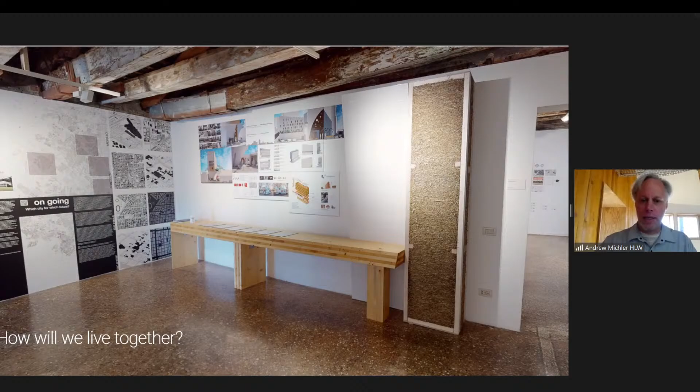Here's the installation that we have in Venice. You can see the Ecococon panel and the LignoLoc table, CLT table here, and then a display of concept projects. Certainly that how will we live together theme was very much on the principle of what I was thinking about as this project was coming into being, the concept.

Part of the framework for that, a good place to start, is this ProPublica article that came out, I think last year, titled Where Will Everyone Go? It was basically an examination of how climate change is impacting Central America, especially around agriculture, and how it's forcing large populations both into the city and up north.

I'll read this quick quote from it: By 2070, the extremely hot zones like the Sahara, that now cover less than 1% of the Earth's land surface, could cover nearly a fifth of the land, potentially placing 1 of every 3 people alive outside the climate niche where humans have thrived for thousands of years.

So that's the reality that we're living in. And how will we live together? Where are we going to live, and what are we going to live in is kind of what I'm looking for. So in my proposal, I'm looking at a building that will be housing for climate refugees from Central America.

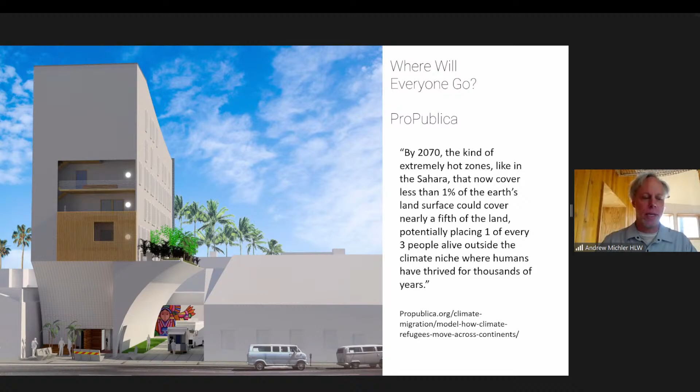Essentially, in Los Angeles, I chose a place called Wilshire Boulevard. Wilshire Boulevard, in some ways ironically, is the invention of what we call strip malls in the United States. It was the first place where you parked, walked to the shop, then went back to your car and drove to the next shop. So it's the invention of kind of modern America.

But it's becoming extremely urbanized, happily. The project itself is near Koreatown, on a kind of lot. The idea was to take a lot that is quite dilapidated, mostly parking, a very simple single-story building in a dense area. The metro station just came in there, so it's a good place to start thinking about where we can put larger scale housing, especially in Los Angeles, where the housing pressure is enormous.

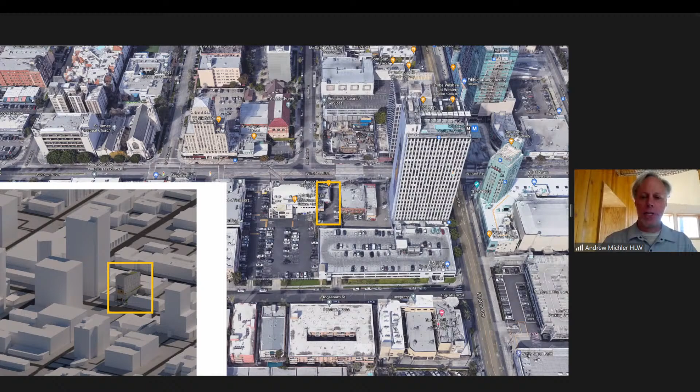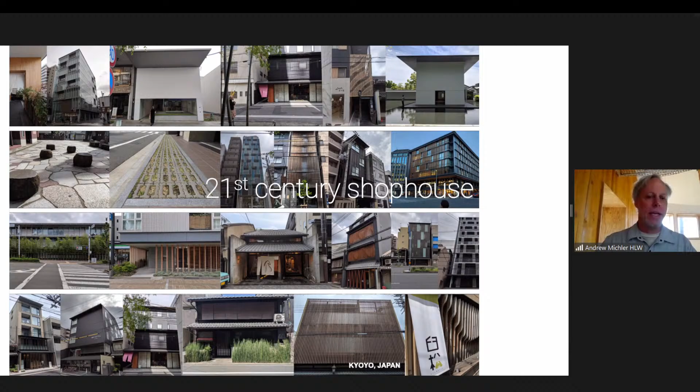Part of the concept, a large part of it, was reinventing the idea of the shop house principle. Many immigrants came to the United States and different nations and lived in buildings where they live in the upper stories in the back, and the front would be where they actually did their business, often revolving around food and sharing their cultural contribution in the form of food. So that was the place to start, thinking about how we will live together, how people will be integrated into different places.

The other component was I developed a food truck with a friend. It's actually a coffee truck, coffee bar, espresso bar, we call it. Part of it was the idea of how do we release ourselves from food in the brick and mortar. So we decided to look at food trucks and converted a 1979 Toyota camper into a full service espresso bar. That's been quite successful. It's won architecture awards, and it's been a lot of fun to put together.

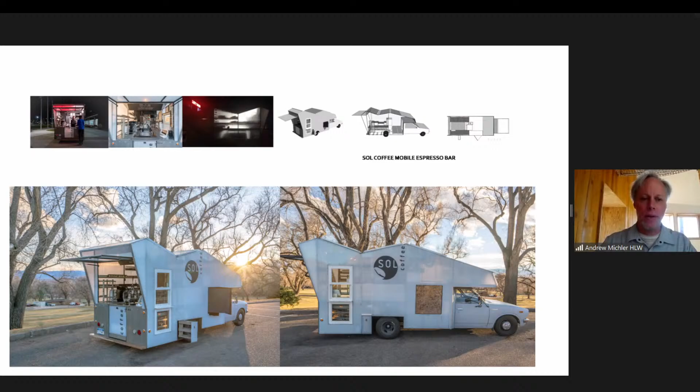So the idea was how to integrate the food truck culture back into Wilshire Boulevard and bring people back into that enormous sidewalk, that enormous tarmac, how to reactivate that for people again. And then also as a place for, there'll be a commissary kitchen there, another place for people who live there to actually work with the trucks, or start their own small food businesses on site.

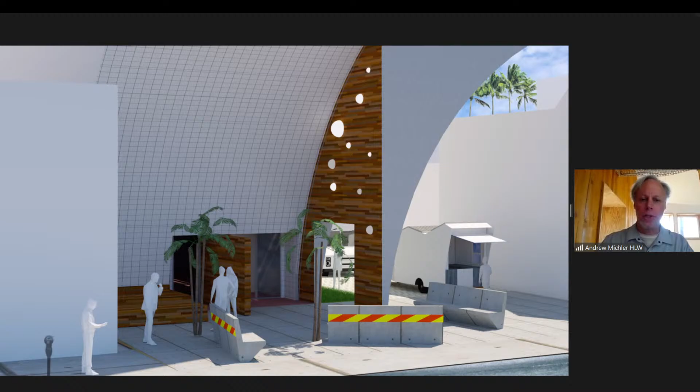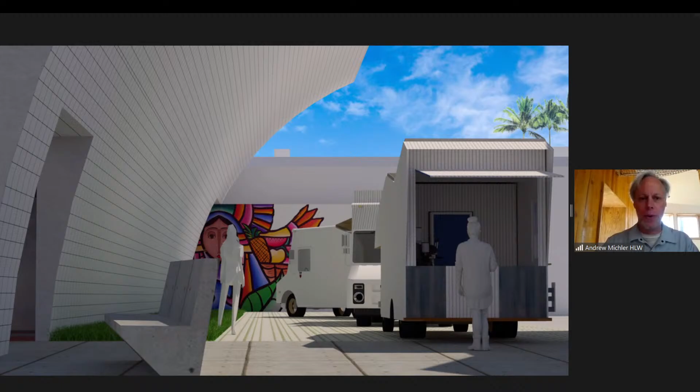So it's the integration of those different layers and textures culturally, is the idea. The food pavilion itself, I'm calling it, is quite generous in size, can hold maybe 5-6 trucks. It has a large shaded area for people to queue and eat their food and kind of cool down, enjoy an afternoon.

The building itself is actually not oriented particularly well, and this is a passive house. Jessica will talk more about passive house later on, and the principles and ideas around the energy side of it. But our biggest issue was with the lot, most buildings faced west or east. So with a west-facing building, how do we keep it from overheating, for instance? It's extremely aggressively shaded for where all the apartments are facing towards the west. But at the same time, the apartments have full access to the exterior.

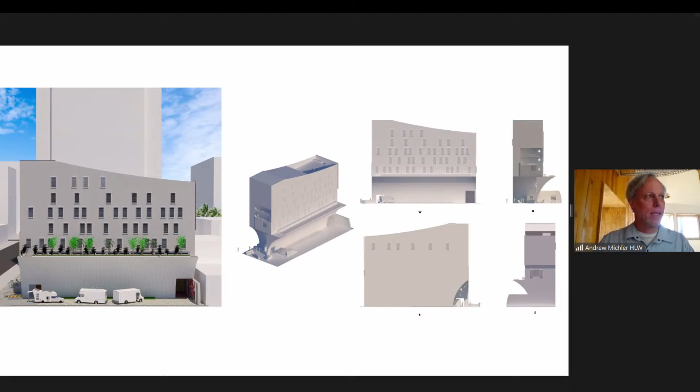It's very simple. It's a building 7 stories tall, mixed use. The first floor is where we have a commissary kitchen, a small bar, public bathrooms like that. Second floor is kind of an open program, and then layers of different unit types from single people to small families to potentially even larger families, is the idea.

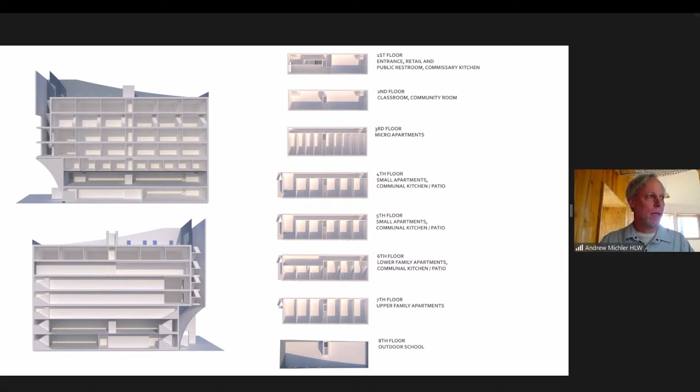And the front of the building is a series of patios that are shared commonly. So people have access from the outside on each floor, and each floor also has an open space, open kitchen. This is something I hope to see much more often in residential buildings, more public spaces, so there's much more connectivity through the program for people, and also creates opportunity for them to invite friends and use the space more actively over time, rather than being stuck in a small box all the time.

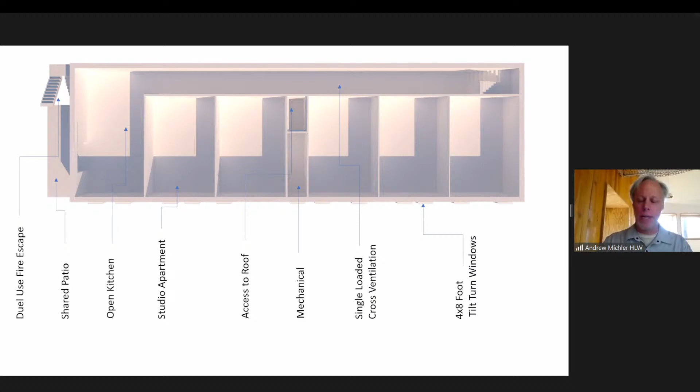And lots of other attributes that are really helpful for these scale buildings, especially for single loaded buildings. We can better naturally ventilate them, creating access to the roof for a potentially outdoor school, and then the shared patio. The fire escape itself also doubles as a way to egress through the building without necessarily using the elevator, connecting those floors more organically.

On the material side, and what we'll talk mostly about today, is the building itself. Now, this is a passive house, so it's what we call a fabric first process. We look at the energy efficiency of the building, meaning the thermal boundary conditions, and optimize them to reduce heat gains and losses in the building very carefully.

We're also using something called an Ecococon straw panel, developed in Europe by Bjorn Kierulf, and he'll get into some detail on those things. I was really inspired by his process of developing a 5-story concept using these straw panels. Essentially, they're a certified passive house component, so they're already within our energy model. He graciously helped develop a 4-story upper part where all the apartments are.

And it's sitting on a podium developed in part by LignoLoc, utilizing LignoLoc wood nails by Beck. They've also been developing a cross laminated timber, CLT, with diagonal bracing for shear. So it makes an excellent podium.

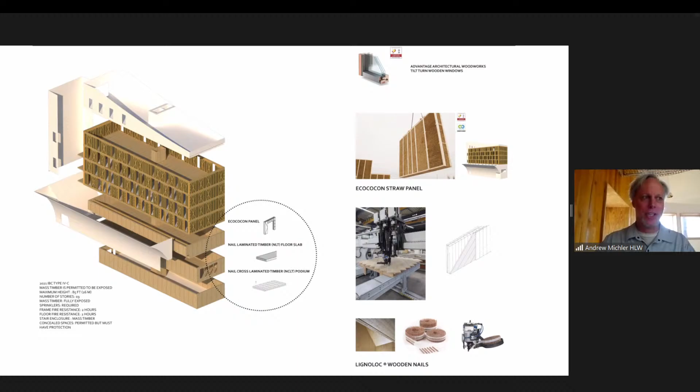So when we put all these components together, we're looking at basically a biomass building that has at least the potential to be carbon sequestering, if not carbon neutral in its fabric, while also using passive house methodologies. I'll go into a little bit about that later. We're looking at essentially a zero energy or on-site renewable building as well. So carbon is very much key to this, because climate change, climate refugees - why put them in buildings that are climate catastrophes, which is essentially what most modern buildings are at this point?

Ecococon panels - Bjorn will get into specifics - but the first question everybody asks is, well, it's straw, it's going to burn. So this is from Ecococon: the straw of Ecococon panels is compressed at a density of 6.9 pounds per cubic foot, leaving no space for oxygen that would fuel the fire. Straw has a high content of silica, a natural fire retardant, which is amazing. When burning, both materials create a charcoal insulation layer on the surface that protects them from flames. So these buildings are extremely safe.

They're extremely durable. The idea of Temporal.haus is how a building can change program on a daily basis, but maybe be a 200, 300-year building that can be deconstructed over time.

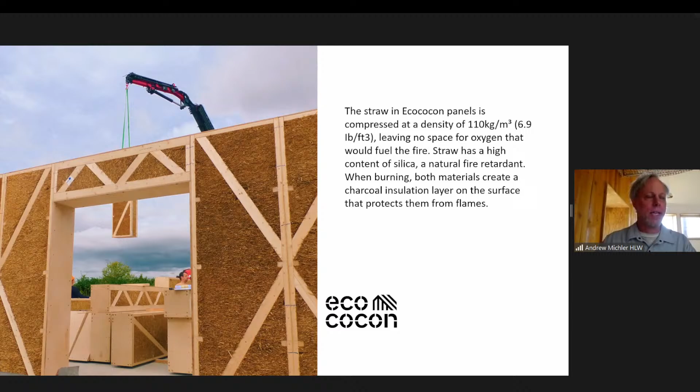The wooden nails are absolutely fascinating, and they really help reduce the amount of inputs you have to do to create CLT, making it much more available for smaller producers to develop. I'm thinking the potential of having a glue-free CLT out there in the wild would be fantastic.

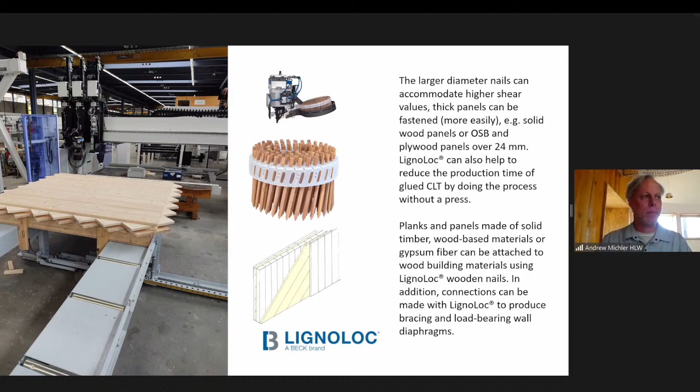We can also make nail laminated timbers, great for long spans like floors, which we're proposing for this building - essentially taking a 2x6 and nailing them together. That becomes a floor slab. They can also be easily deconstructed. We don't have any steel in the buildings, or a minimal amount, so you can cut them and deconstruct them quite easily and reuse them.

Part of the passive house side is, of course, ventilation. We're able to use an American company called Ventacity, which developed an HRV/ERV heat recovery ventilation system. In this case, we're using one on each floor, and we can also use them to distribute cooling for each apartment, doubling up the fresh air system with the way of tempering the spaces.

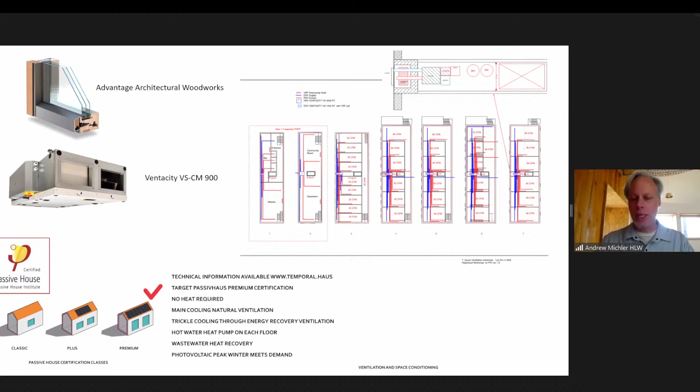There's more technical information on the website, Temporal.haus. We really don't need heating. We need basically a pretty low load for cooling because we're quite aggressive with the window shading, and mostly it's internal heat gains we're concerned about. Even our hot water heaters - heat pumps - add a cooling load to the building by taking the ambient air and heating water with it. So at the end of the day, our operational energy is essentially negative.

It's 130 kilowatt-hours per square meter annual negative - in other words, we produce that much more energy on site than we consume, net. So that's quite interesting to find that result, that we can do that with these extremely small loads, especially for conditioning, air conditioning, and low or zero heat.

On the materials' embodied carbon, I've run a calculation of the project. We're looking at 224 kilograms of carbon per square meter for the building, and hopefully Jay can unpack that number and what this means in the real world. Most buildings are quite a bit more.

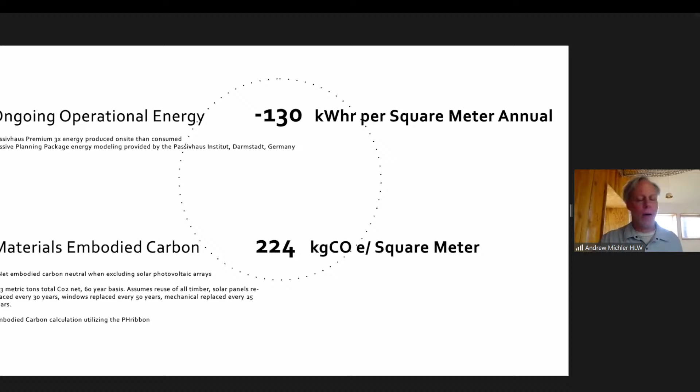And I'll have a couple slides. I'll go into what the calculator is.

For the PV system, I just wanted to make a quick note, is we had to put a lot of PV on the building to make this building work as a passive house premium, at least potentially a passive house premium building. Passive House Institute helped with the calculations.

And why that's important is because in winter is when our peak heat or peak loads are typically going to be, often with lighting and other things like that, and shorter exposure to the sun. So we want to look at solar production, not on an annual basis necessarily, but on that daily operational basis for it to be a truly net zero energy or an energy positive building.

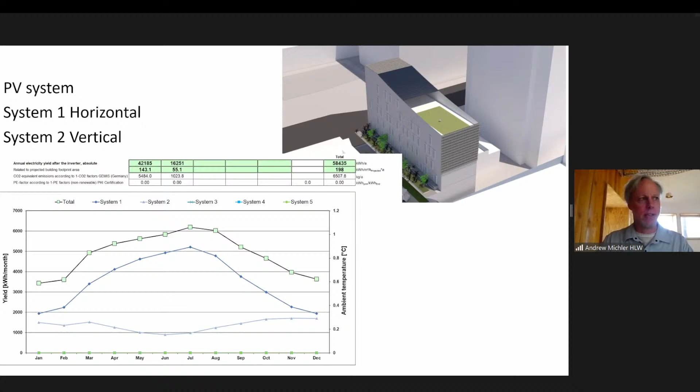For the Passive House verification and help with the Passive House Institute, and quite a bit of tweaking, I was able to see if we can just slide it right into what we call the Passive House Premium. And that's based on the Primary Energy Renewable component of Passive House, which connects the energy consumed with the energy that's produced on site through renewables.

One little funny thing is that I found out that when I put in double pane windows to see if we could save money, it's Los Angeles, right? All of a sudden my heating load went up quite a bit. So by putting in triple pane windows, my heating load was negligible, which means that my distribution system is much more simplified, as well as my energy load.

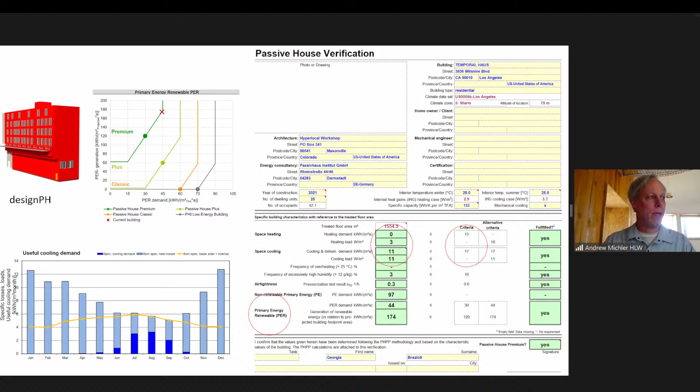And also triple pane windows are fantastic because they make a much quieter apartment. And you can imagine if you have a busy commercial space underneath with people outside, you can close the windows upstairs on Wilshire Boulevard and be very, very quiet inside the building. And it's certainly not very much more expensive, if at all, now between double and triple pane windows. So an interesting little fact to see when you're designing these high performance buildings.

On the carbon side, this is a quick run through a carbon calculator that we use, now available, called the PHribbon. And quickly, it's net embodied carbon. There is an embodied carbon to the building, even with all these kind of amazing resources that we can still put in the building. At the end of the day, it still takes some carbon for the building to work.

A lot of that has to do with the PV, and the PV is being replaced every 20 or 30 years. That turned out to be the largest single item on the carbon impact. If we took the PV out of the actual calculation, then it's essentially net carbon neutral. I'm sure there's things I missed, maybe more concrete, maybe more mechanicals, things like that. But we're getting close to that almost net carbon neutral component.

And that's assuming that we can reuse, that we're not throwing away the building at the end of its life use. We're reusing the materials in it, like the timber, straw, things like that. And so that's the good news. It's not particularly easy, so part of the idea around zero carbon, net carbon, is the disassembly of buildings as well. So we'll go in and talk with Jay more on what embodied carbon materials means.

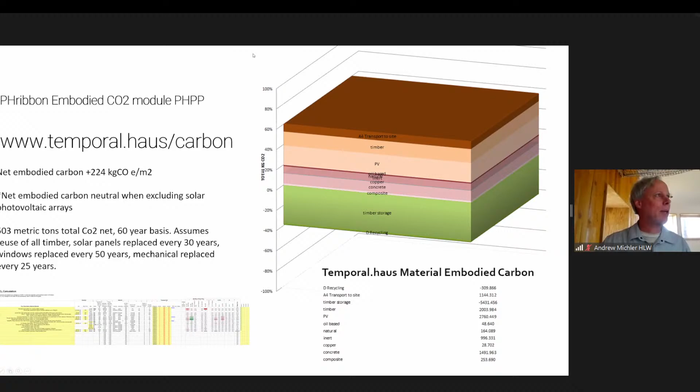Excellent. So hello, everyone. My name is Jay Arehart, and I'm a teaching assistant professor at the University of Colorado Boulder, so just down the road from where Andrew is at. And my research and teaching focuses really around embodied carbon, specifically low carbon materials, and also carbon storing materials, as we just got a look at in terms of this Temporal.haus project.

And I really look at how the adoption of these materials can be used at scale within building stocks in order to treat buildings as a potential climate solution, leading to drawdown. And so what I'm hoping to share with you today is a bit of a background on what is embodied carbon, why is embodied carbon important in today's built environment, as well as then share with you a framework for how buildings, such as the building that we just saw, can be a part of climate responsive design and a solution to climate change.

Buildings release greenhouse gas emissions, which I'll refer to as carbon, at different stages throughout their lifespan. If we think annually about a building constructed today through 2021 and beyond, there's an initial pulse of emissions during construction due to extraction of raw materials, transportation of those materials to the manufacturing site, the energy required to turn raw material like iron ore into steel, and then transportation from the manufacturing facility to the construction site.

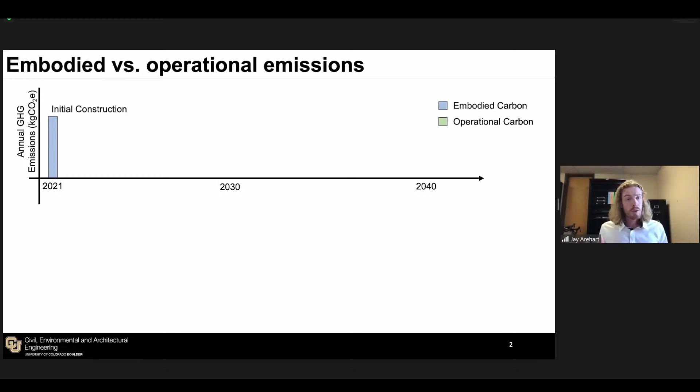This is what we call the upfront embodied carbon of a building. It's a substantial portion of the total life cycle emissions, or the whole life carbon, and all those emissions happen today during construction, prior to the building even being occupied.

As we occupy the building, we have space heating, space cooling, and lighting demands, which result in emissions. The annual scale of these emissions is typically much lower in magnitude than that initial pulse during construction. As we're operating our building, we'll also potentially have some refurbishment or retrofit occur at some point in the future.

So sometimes there's the upfront embodied carbon with that initial construction, but also additional embodied carbon that comes throughout the course of a project. At the end of life, if we're demolishing or deconstructing our building, there will be additional embodied carbon associated with that.

When we couple together embodied carbon and operational carbon, we get what is called whole life carbon, and that's really what we want to reduce over time. Understanding that there's not just operational carbon but also embodied carbon is important, and holistically evaluating all these together is needed if we're really going to decarbonize the built environment.

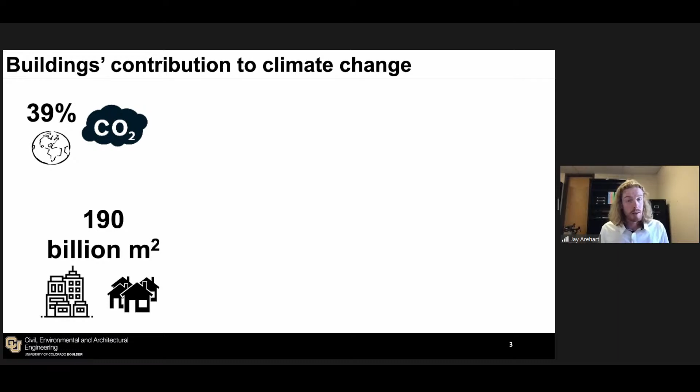So while operational emissions are significant and really important to reduce, and we've been making great strides there, attention also needs to be paid to the embodied side of the problem.

To illustrate that, in a typical building historically about 75 to 80% of total emissions would be on the operational side, with a small portion being embodied carbon. But as we reduce operational emissions through more insulative building envelopes, electrification of buildings, and decarbonization of the electrical grid, the portion of operational carbon is reduced, yet the embodied carbon becomes a much larger portion of the pie.

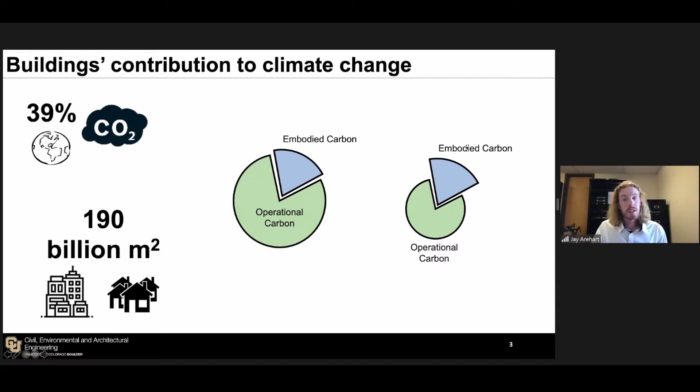This gets me to the concept of not just building net zero energy buildings, but also looking at what is absolute zero buildings. What is the absolute zero carbon? How can we get not just the operational carbon down to zero and offsetting that with renewable generation, but also looking at the embodied aspect.

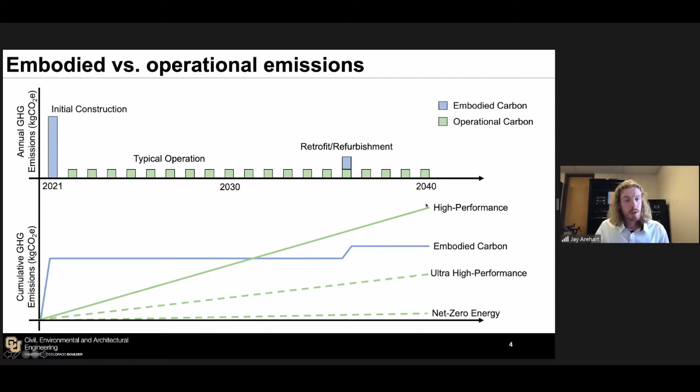So as we start moving from typical construction to high performance buildings, ultra high performance from an energy perspective, all the way down to net zero energy, when we add these two together and look at what the whole life carbon might be for a building, a large portion of that is going to be in the embodied emissions. So that's a bit about the separation between operational carbon, embodied carbon, under the whole umbrella of whole life carbon.

Coming back to what I started this discussion with is how can buildings be part of the solution, as we inevitably will need to build new buildings for climate refugees, the growing population across the world, as well as the retirement of existing buildings.

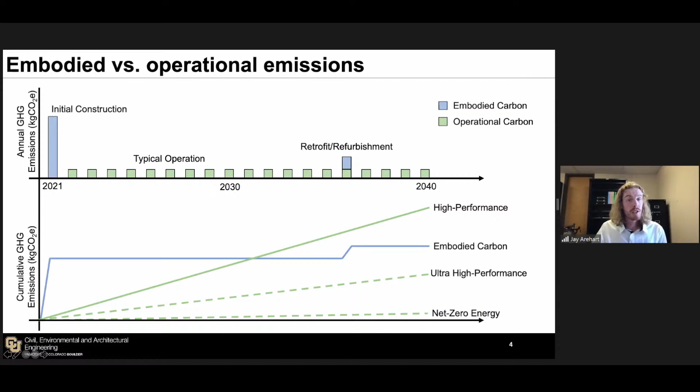So as we start to retrofit and build new buildings, how might buildings become part of the solution and reduce the carbon emissions associated with them? And how we can do that is through the use of carbon storing construction materials.

Andrew just spoke about a couple of those, with the timber-based panels as well as the straw-based insulation. Those are two types of materials that sequester carbon during the growth of the biomass, as well as store carbon when they're placed into buildings.

Examples are blown-in cellulose, cork insulation, hemp lime composites or hempcrete, as well as structural materials. Straw bale construction is a typology of building that we can build residential buildings with, as well as engineered lumber, or engineered timber products, and dimensional lumber.

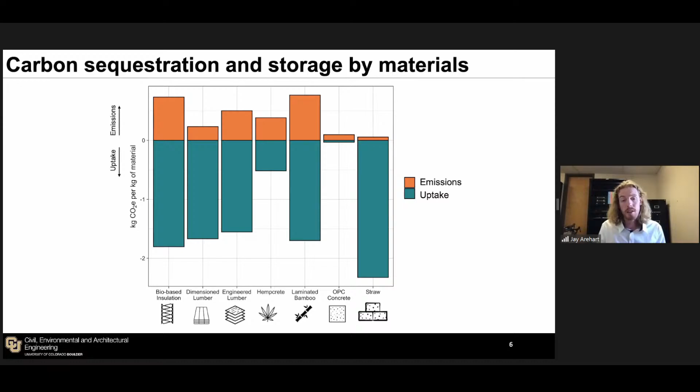So now we understand a bit about bio-based materials that store carbon in them, and we can then store carbon in buildings. It's important to understand that when we place a carbon storing material into a building, we need to measure what its climate benefit is going to be. Just storing carbon, cutting down a tree and placing it into a building in the form of wood, isn't going to be beneficial until we regrow that tree.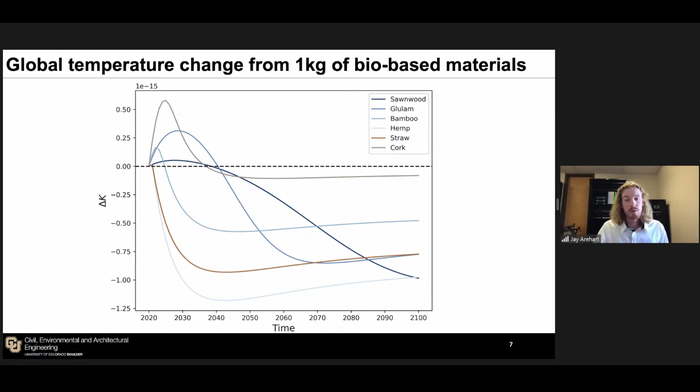So what this means is that if we want to meet 2050 climate goals and think of buildings as regenerative and part of the climate solution, we need to start looking at fast-growing crops like hemp, straw, and bamboo, and incentivize their adoption because of that quick net cooling effect. Whereas for longer growing crops or forests, like glulam materials and sawnwood, the impacts are delayed because it takes time to regrow that carbon.

So coming back to putting this all together: what happens when we have some embodied emissions from the initial construction. We're going to need concrete for our foundations, we're going to need some steel, as well as emissions associated with the initial manufacturing. When we couple all this together, we can start to move towards absolute zero carbon buildings.

Where we are doing well on the energy front with net zero energy, we have those initial embodied emissions, but after regrowth and adopting different bio-based materials, we can lead to this net cooling effect, offsetting the embodied emissions and really working towards that absolute zero. Yet care must be taken at the end of life.

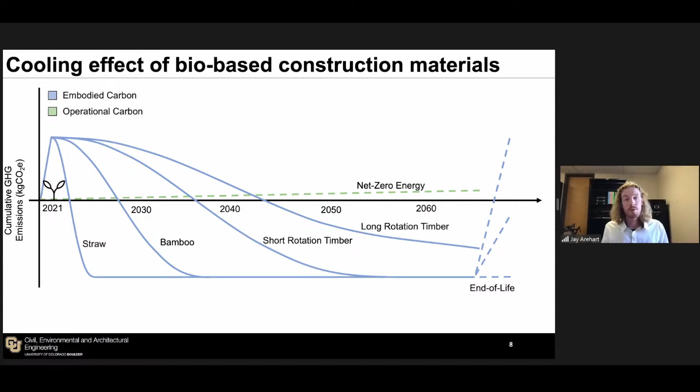While storing carbon in a building is great, it will be released back to the atmosphere if we don't take care to ensure that our carbon storing construction materials are reused, repurposed, and that carbon is locked up in the anthroposphere. We want to keep that carbon in our buildings, and then regrow our trees, and that will lead us to be able to meet near-term climate goals through buildings.

So my key takeaway here is fast-growing bio-based materials are presenting a tremendous opportunity for us to transition buildings to be net cooling, and they will be able to help us meet those near-term climate goals. So thank you for your attention.

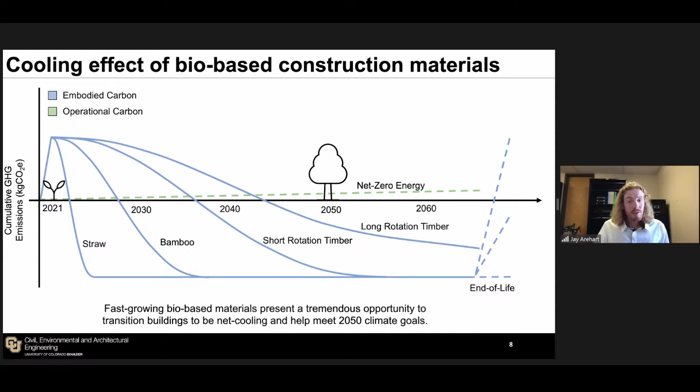Jessica, you're up. We're going to talk about the energy side.

Yeah, thank you very much, Andrew, and thank you very much, Jay, for that presentation. Happy to pick it up from here.

So hello everybody watching this session. Just give me one second to set up my computer. Here we go.

Hello everybody watching this session. It's great to be here to present alongside Andrew and the other very inspirational speakers on this great project, and to share experiences and knowledge.

My name is Jessica Grove-Smith, and I'm a scientist. I want to interrupt you real quick, we're showing your presenter slide, not your... Oh, I'm sorry, okay, give me a second. Here we go, does that work? There we go, perfect, thanks.

Perfect, thanks a lot, Andrew. Okay, so as I was saying, I'm Jessica Grove-Smith, and I'm a scientist, and I'm also a joint managing director of the Passive House Institute. We're based in Germany, and as a research institute, we define and develop the Passive House standard, which is the standard to which this temporal house was designed.

My opening quote to this presentation is: what we build today will be our emissions legacy. That really picks up on what Jay was saying earlier. It encompasses different stages of the building's lifetime. Of course, we need to be looking at the carbon emissions that go into the material choice. What I want to focus on is the aspect of emissions during the lifetime of the building, during its operations.

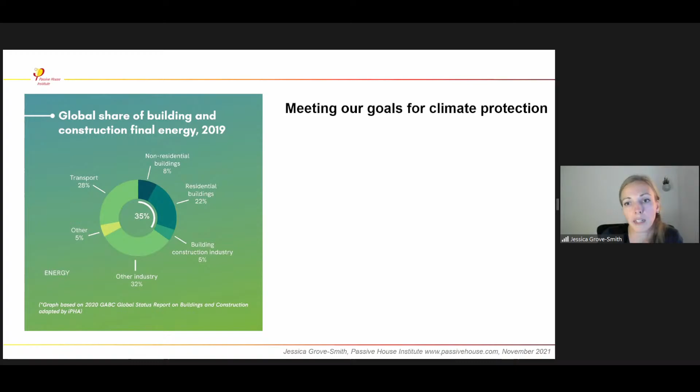It's being picked up by many communities and municipalities as a pathway, as a solution to meeting the climate goals. What you see here are just some examples of Passive House projects implemented around the world that recently were awarded prizes as part of the Passive House Award internationally.

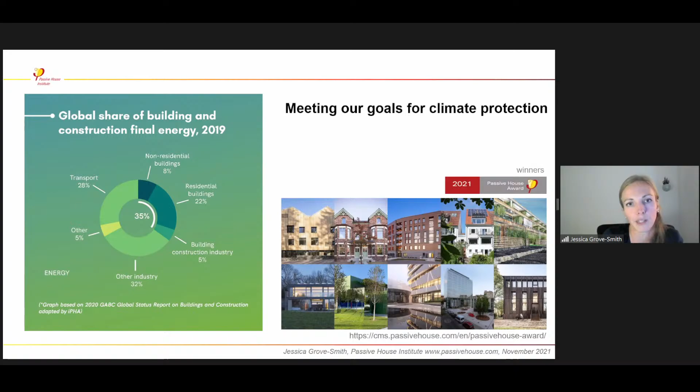So what exactly is a Passive House? We're a little limited on time, so I'm not going to dive into the technical details. But as I said, the concept focuses on high energy efficiency. That's what it was designed for.

The general approach is to design buildings under the local context, under the given conditions, for high thermal comfort and high indoor air quality. So we have high quality buildings, but they're designed to provide that with the minimum energy input for heating and cooling.

It's very much a fabric-first approach, as Andrew was saying in his introductory presentation, but then also making sure that you have a simple and robust heating and cooling system.

It's a performance-based standard. That basically means we've defined a maximum allowed energy demand that you have to design your buildings to. So the buildings are optimized through design and operation to meet these maximum energy targets.

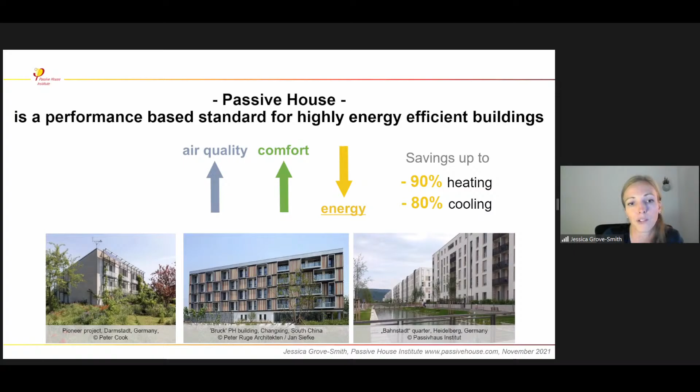What we're achieving by implementing this approach is energy savings around 90% for heating compared with a conventional building stock. If you look at these numbers, they're very significant, and they're really decisive for the amount of emissions you have during the lifetime, during the operation of the building.

How the Passive House concept works in detail is not part of this talk. The Temporal House is a great example, and there are many, many more examples worldwide. So I encourage you to take a look at this website, for example the Passive House database, where you can browse examples internationally.

A special occasion is coming up this next weekend. Every year in November we have the annual International Passive House Open Days, where residents open their homes and share their experiences. If you go to this website, have a look, you might be able to visit a Passive House live. We also have online events where you can learn more from people with practical experience who've chosen Passive House as their pathway to move forward on real projects.

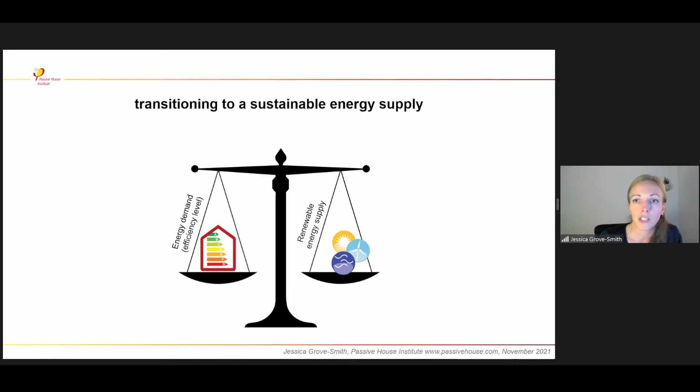In my remaining time today, I don't want to focus only on the energy efficiency aspect, but also on the synergies between energy efficiency and renewable energy supply, because what we ultimately need is both. We need our buildings to be energy efficient, but we also need them supplied from carbon-free renewable energy resources to reach our ultimate climate targets, our climate goals.

So what I want to highlight in the first place is that high energy efficiency, all the way to the passive house, is an absolute prerequisite for enabling such a fully renewable energy supply. This low energy demand that we can achieve by applying the passive house concept is absolutely essential to make a fully renewable infrastructure feasible in the first place.

If you're considering aspects such as cost to expand the existing infrastructure to build more renewable energy supplies, and the available space that we have in different parts of the world. It's particularly effective and important to reduce the energy needs in winter, for the heating demand that we have in buildings, because this is when we typically have a supply gap from the renewable energy sources, which in many parts are dominated by solar energy.

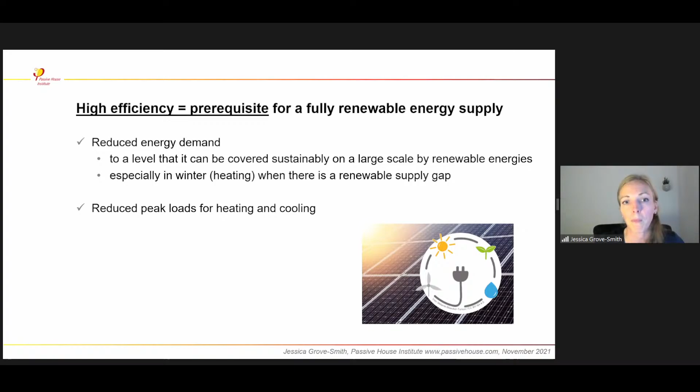These are aspects we need to take into account when designing and optimizing buildings for a renewable energy supply. Now, a concept that's quite popular and well known is net zero as a target for building design. It's very intuitive, yes, it's great, but I'm allowing myself to question it and suggest an alternative way of thinking about buildings within the context of a renewable energy supply. The problem is that net zero, whilst intuitive—you balance the amount of energy needed over the year with renewable energies—it can be fundamentally misleading.

For one, it's a lot harder for multifamily buildings to reach the net zero target, simply because you have a fairly small roof space in comparison to the living space. And that's a problem. This project, the Temporal.haus that Andrew presented, highlights how important multi-story, multifamily buildings are for so many social and sustainability reasons. So there's some kind of problem if we discriminate against or make it more difficult for multi-story buildings. So we try to look at a different solution.

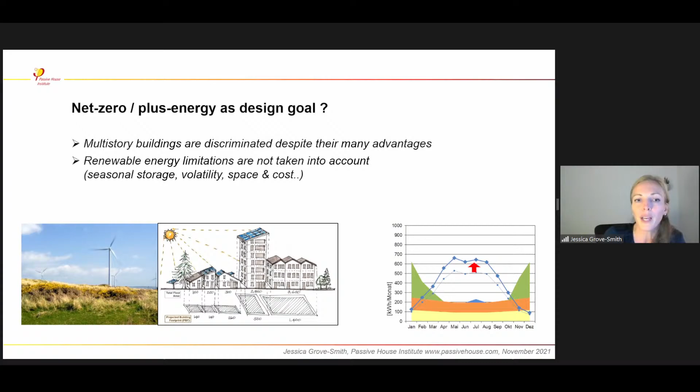Another aspect that's problematic about simply looking at net zero is that it doesn't fully take into account the limitations and volatility of renewable energy supply. For example, any space constraints or infrastructure implications when we need seasonal energy storage, transporting or storing energy supplied from solar energy during summer to winter when we actually need it to heat the building. So net zero is useful, but it also has its limitations.

As an alternative, we've developed the so-called Primary Energy Renewable scheme, which was also chosen as a design target for Temporal.haus. This method was designed to factor in exactly these renewable energy aspects. It specifically calculates how much renewable energy you have to feed into the grid in order to fully cover the energy demand of the building, specifically taking into account any losses that occur along the way. So that is what we generally apply for the passive house standard.

With the PER approach, it's essentially a design guideline to optimize buildings for a renewable energy supply. First of all, we define minimum efficiency requirements as the very baseline—that's our passive house classic standard. That's the prerequisite: energy efficiency as the starting point, as key.

And then for the higher standards, passive house plus and premium, we encourage the use of available space for renewable energy supply—not necessarily aiming for net zero, but making sure that the space the building occupies is used as best as possible for renewable energy supply. This project targeted passive house premium, and as Andrew was saying, that's quite an ambitious target. It meant covering a lot of the roof space, but also making use of the facade for renewable energy supply.

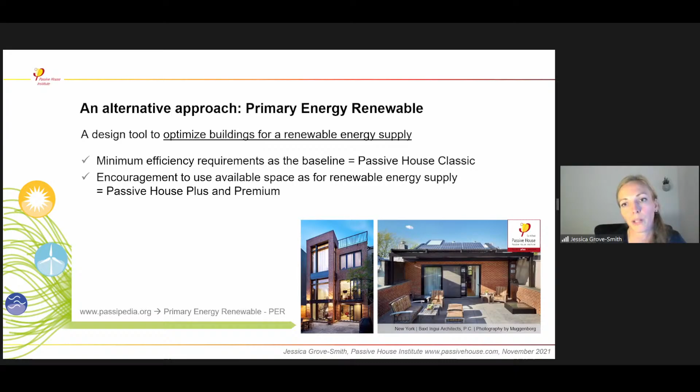And from our studies and research, we see that if we apply this consistently, then we can really manage realistically to transition to a fully renewable energy supply for buildings.

And with that, I'm coming to a close, and my closing message to all of you today is the same message we'll be bringing loud to the upcoming climate conference and the events we're attending over the next weeks: think efficiency first. Keep in mind how important it is to focus on energy efficiency and reduce the energy needs we have in the first place. Any energy we don't need won't imply carbon emissions. So think passive house as an essential ingredient in tackling the climate emergency. Thanks. With that, I hand over to the next speaker.

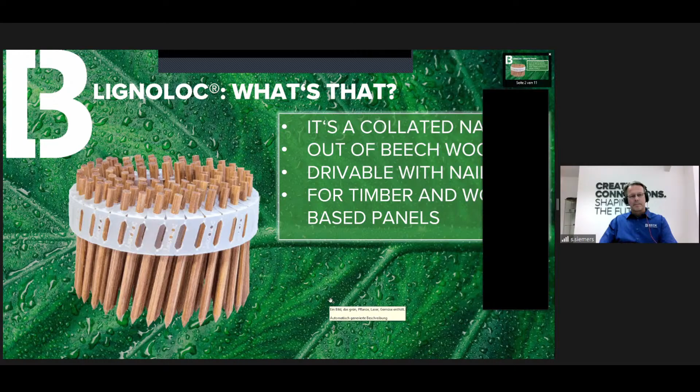Due to this connection, we have a very, very strong bond of this nail in the timber. We can say that LignoLoc is the most sustainable fastening system on the market. We can save up to 70% carbon dioxide emissions compared with steel nails with similar shear forces. That means when we talk about a 3.7 millimeter nail, we don't compare it with the same diameter - we compare it with a 2.5 millimeter nail, because these are nails with the same strength.

It is the only fastening system that fully endorses circular economy. That means if you're connecting wood panels or timber to each other, you can cut the connection afterwards, after the period of using the parts. What you have afterwards is, for example, a panel with a nail inside, and this nail is made out of the same material as the wood around it, so you can reuse it again. This is a very big benefit if you're thinking about circular economy - you don't have to destroy the material and make, for example, panels out of it. You can reuse the material as it is afterwards.

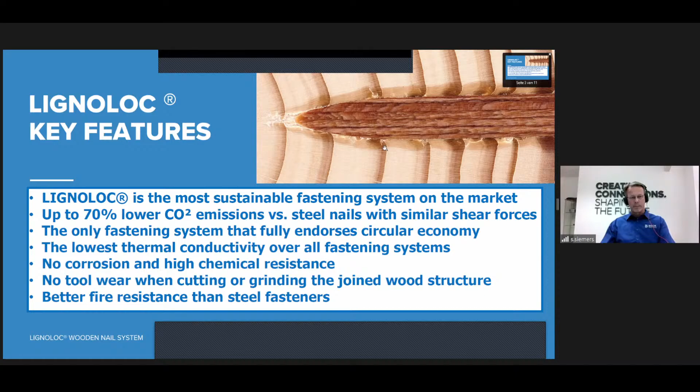And we have better fire resistance than steel fasteners. This is confusing at first, but the problem with steel fasteners is that the temperature - if there's a wall, a surface exposed to a fire inside the room, the temperature will be guided to the steel fastener inside the substructure, and this leads to coking, to char around the nail, and the bond will be destroyed before the surface is burned down. This is something we haven't seen on LignoLoc nails.

One very big topic for LignoLoc is the so-called LignoLoc cross-laminated timber wall system. We call it LCLT - the name is given by us. This is a wall design that gives every carpenter the ability to build massive timber walls without expensive machinery. Normally, if you're making CLT panels, you need big machines like vacuum presses, or if you go to a very big dimension, like here in Austria, we have a lot of CLT manufacturers. They need a very big room to make these wall elements and a lot of energy.

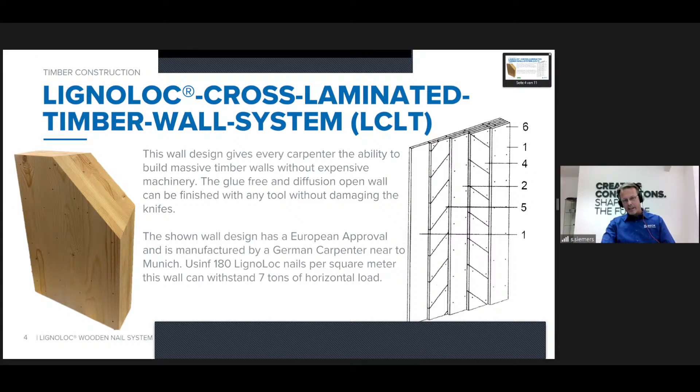The next benefit of this idea is the glue-free, diffusion-open wall that can be finished with any tool without damaging the knives, as I said before. The shown wall design, as you can see on the right side, has European approval, and the manufacturer, located nearby our location, is allowed to make these walls for load-bearing usage. He uses approximately 180 nails per square meter, and this wall can withstand 7 tons of horizontal load in a test, which is a lot.

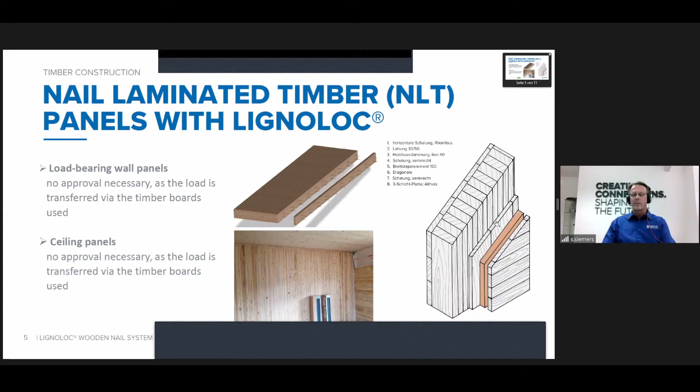Another way of making massive timber walls is nail laminated timber. We call it NLT, and you can also connect the panels with LignoLoc. You can use dowels like it was done in the past, but the benefit of nailing is a much faster system, and you can save a lot of labor cost. What you need is some kind of sheeting outside to take over the shear forces.

Or you can use it as standard. In the US, you call it a 2x4 system. In Europe, it's coded by Eurocode 5. In this system, you can also use the nails to attach the bracing and the diaphragms on the studs.

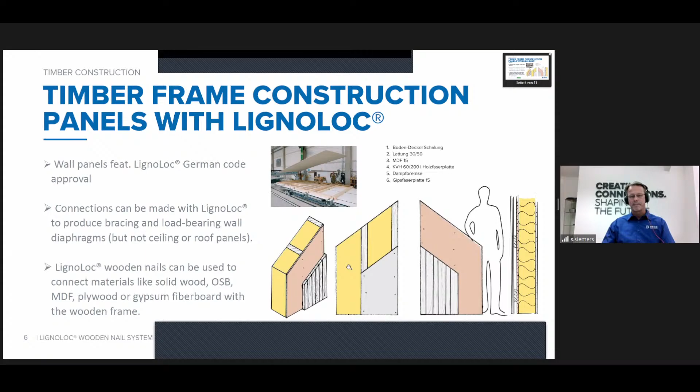But one thing that is very important for our discussion today is the insulation effect. This test we made in-house here, you can see that we took a 3-layer wood panel and fired different fasteners into this panel. From left to right, you can see an aluminum screw, a typical construction staple, the same staple made of stainless steel, a typical nail with diameter 2.8 millimeter and 50 millimeter long, the same nail made from stainless steel, and here the 3 different LignoLoc nails with the different diameters.

And here with the thermal camera, you can see the light. The more you can see, the more is the thermal transport of heat. We did the test with a refrigerator. Inside the fridge was minus 23 degrees, and outside in the room we had 27 degrees. That means the difference between inside and outside was 50 degrees centigrade, meaning 90 degrees Fahrenheit.

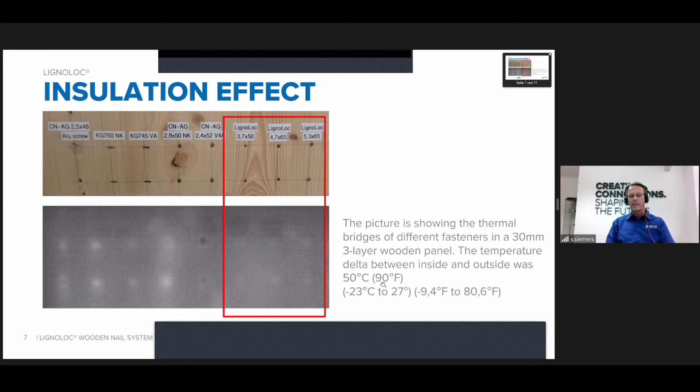And we go to the next page. We measured the outside temperature on the nails, like on the side we can look from the room at. You can see minus 23 like I said before, and 27 outside. On the aluminum nails, we have 10.3 degrees. On the staples, 12.6 degrees. On the stainless staple, 17.3 degrees, and so on. And you can see that the biggest effect was on the LignoLoc nails.

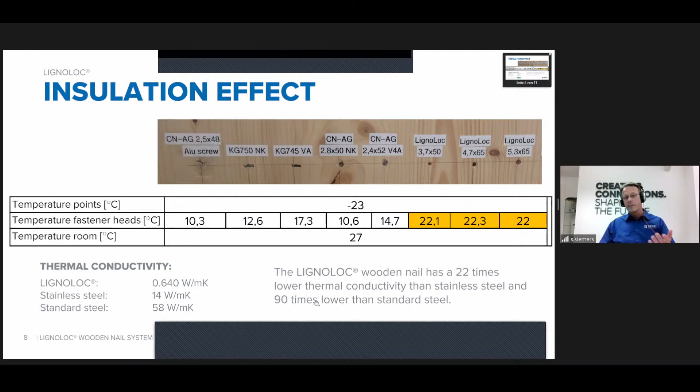We have a thermal conductivity of 0.64 watts per meter Kelvin. Compared with stainless steel and standard steel, we are 90 times lower than standard steel and 22 times lower than stainless steel. That is standard, used for connecting wood fiber insulation, for example here in Austria and in Germany.

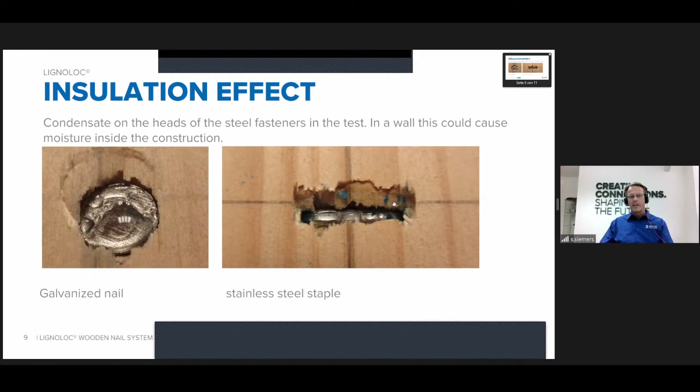You can also see one very big benefit, the condensate on the nails. It means we have it here in our test visible, but normally you have this condensation inside the wood, and this moisture can cause a lot of rot and mold inside the wood, inside the timber.

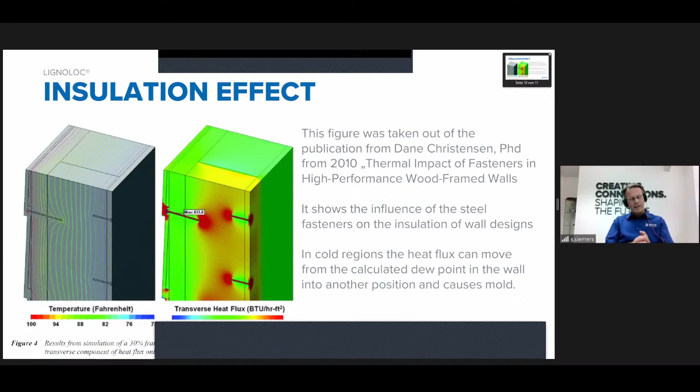Thank you for your attention. Yes, it's a short presentation, but LignoLoc is only a short part of the whole system. I only wanted to introduce you to what we can do and what LignoLoc is about.

Okay, I think it's my turn now. Thank you for having me. I'm going to present the Ecococon wall system. My name is Bjørn Kierulf. I'm the CEO of Ecococon, and I'm happy to contribute to this roundtable.

I hope the whole slide is visible. Our system is a modular system, a Lego-like construction for rapid assembly. It consists of 6 different types of panels that can be produced at more or less any size, and it's always individually adapted to the specific building we are creating. So we can really design in advance, more or less with millimeter precision, the exact geometry of the house, and that makes everything very quick to build on the building site. So this modular system is a great feature.

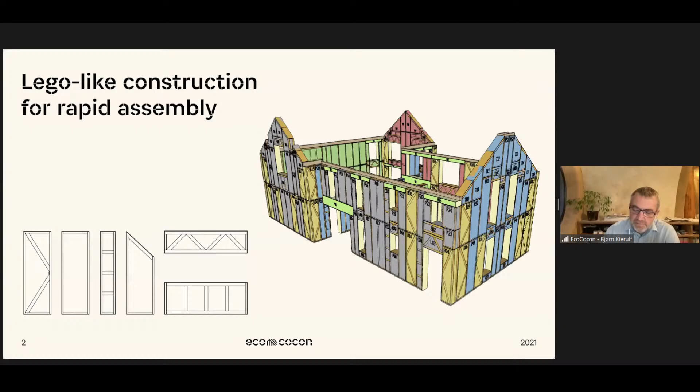But why do we use straw, you would ask, for insulating? It's not the usual material used for insulating a building. Now, it does have a lot of advantages. First, it's a natural carbon sink, I'll talk a little bit more about that later. And it's rapidly renewable - it takes 1 year for straw to mature, it takes 50 years for a tree. And it's also abundantly available, I'll get back to that.

Maybe one of the things you discovered last year is that when wood prices soar, even what we thought was a normal material to use on the building site becomes unavailable. That's when you start to understand that using straw really is an advantage, because of its abundance and because it saves the amount of wood used in construction, so wood can be used more strictly for load-bearing structure. Straw has very good thermal insulation value, a long phase shift time so heat takes time to show up on the inside, great protective values in summertime, and a great fire rating. I'll go into all of this in more detail. So straw has a lot of advantages.

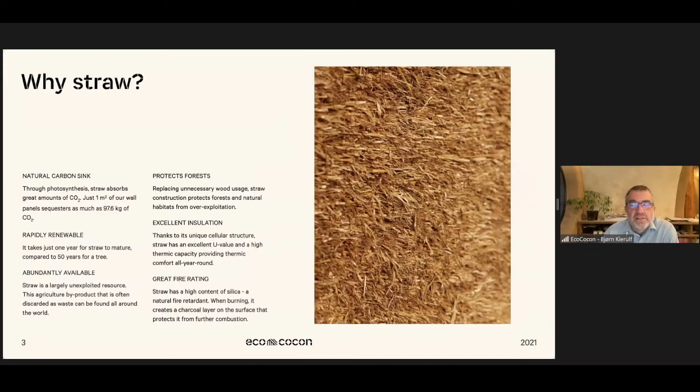Let's look at the first one: abundance. In Europe alone, 144 million tons of straw are produced on the fields every year. They say about a third of this amount can be used sustainably for other things, the rest should be returned to the ground to achieve carbon restorage of the soil. That would be 48 million tons per year. If we use just 10% of that sustainably harvested straw for our walls, we end up with 100 million square meters of straw walls that could potentially be built annually. This is mind-blowing in my opinion. It creates millions of tons of CO2 that are stored in this material, and as you saw from the presentation by Jay, this is what has an impact in the first few years.

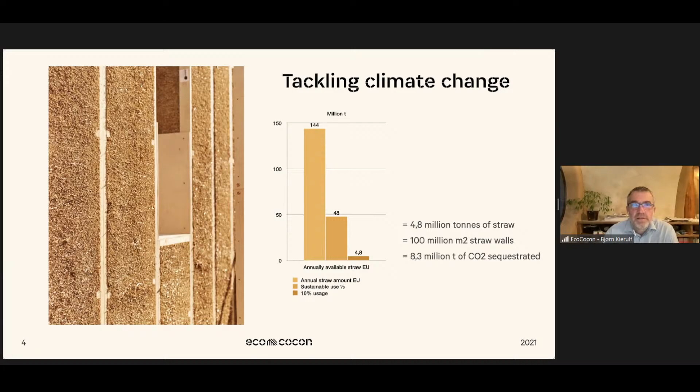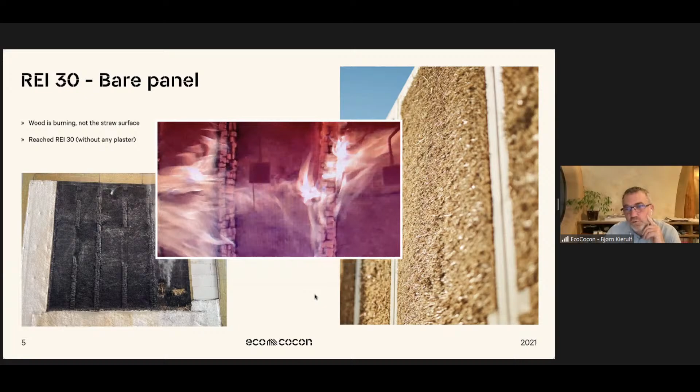The normal buildup is done with sustainable materials. Let's look at the inside first - we apply directly on the straw. That's one of the main advantages of EcoCocon: we can put clay plaster directly onto the straw surface, no OSB board or anything else in between. It goes directly onto the straw. There's a mesh in it, and the fine clay plaster covers it. Today you can have all kinds of colored clay, beautiful interior surfaces created with clay, and these layers protect the straw in an amazing way. In fact, we reached 120 minutes of fire protection with a 3 centimeter clay layer on the straw surface. That means we're able to build really demanding constructions with such a value.

On the outside, we've developed a counterintuitive solution, at least for most architects who know the airtight layer should always be on the inside. But in our case, you can put it on the outside, because we use an airtight but diffusion-open membrane with an SD value lower than 0.2 meters. It's WUFI tested, tested in practice even in climates like Finland, and it works brilliantly. It has an extra advantage: while building with straw, we wrap it the same day and protect it against weather influences during construction. This thin membrane, which isn't that sustainable - it's usually polyethylene or polypropylene - has a huge practical advantage in how it's built.

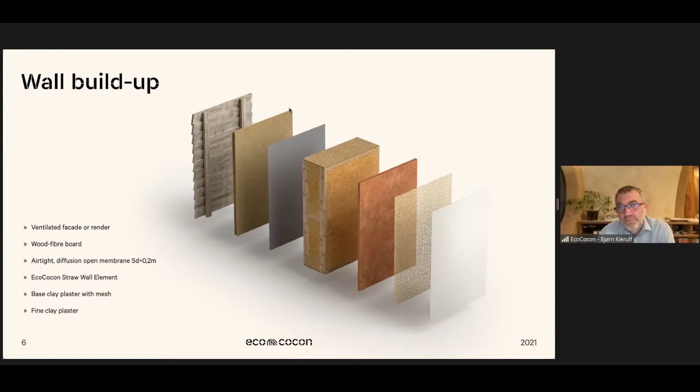We cover this membrane with a wood fiber board, or we've also been using a straw fiber board, which can then be directly plastered with render, or it's possible to have a ventilated facade. Thanks to this buildup, we're able to create a very well insulated construction without any thermal bridges, because the wood is also separate.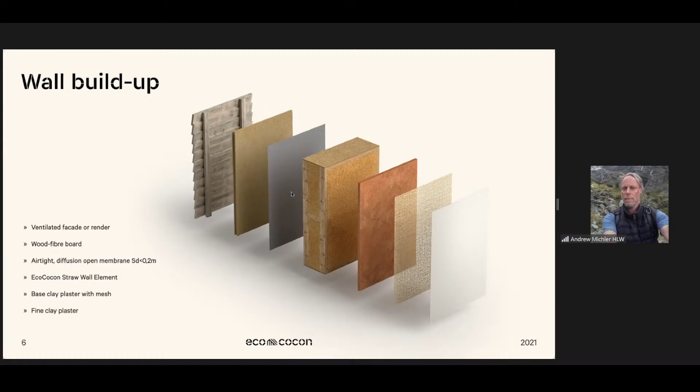No? Is it okay? Good. So, of course, the first thing we did was

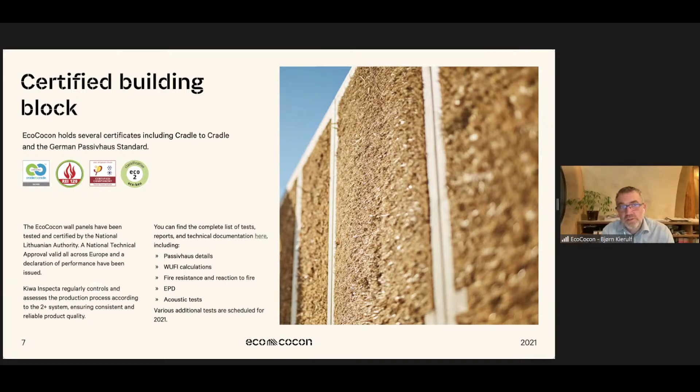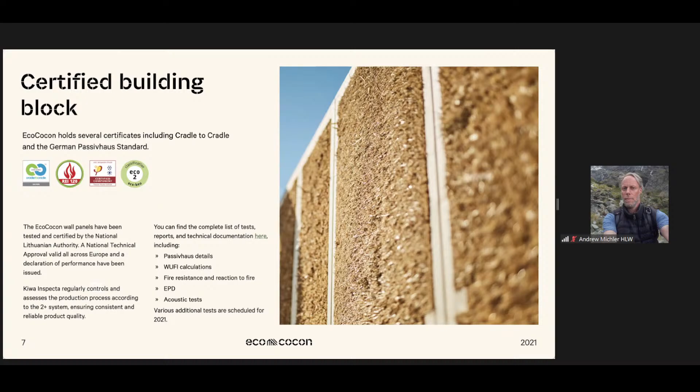We got it certified by the Passive House Institute as a passive house component. We think this is important to set the right standard from the beginning. It is also certified as a cradle-to-cradle product, and I think it's the only passive house component that is also cradle-to-cradle certified. I think this combination is where the future needs to be.

So a little bit about us. We originated in Lithuania - I'm definitely not the designer behind this, but I've come up with some ideas. I'm quite happy that we've been able to implement these buildings now in Slovakia, where I'm based, close to 50 buildings in the last 10 years. The production volume is growing, the interest is growing, and our goal is to have local production in each market. At the moment it's more centralized production, which wouldn't be a very cradle-to-cradle approach, so the idea is to set up smaller production units all around Europe, and hopefully in other places of the world as well.